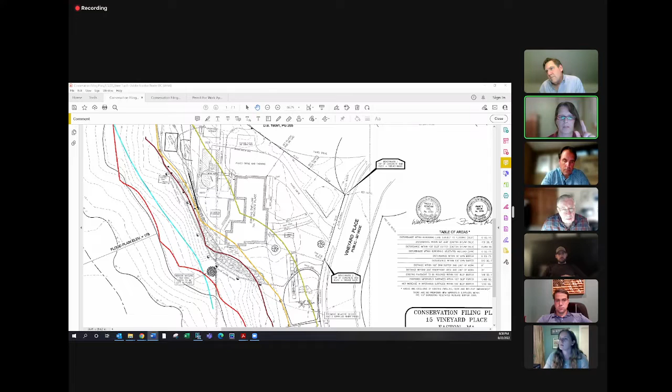You did mention one thing I don't think I caught in the application: the trees being removed from the work zone—is the plan to just cut those and leave them in the 100-foot buffer zone somewhere? Claire: I don't know if it would be all of them, but it was actually a response to your comment asking if trees were cut to be left at 10 to 12 feet. For some of them, because there would be regrading involved, they might not be able to remain. So if there are trees that have to be cut down to the roots or just stumped, the applicant's open to having some of those dispersed in the forested area to allow for wildlife habitat.

Jennifer: Okay, I'm sorry, I didn't mean for any tree, just the oak. Claire: Oh, okay, yeah, obviously you need to remove those trees to do the project. Jennifer: Yeah, sorry, that wasn't clear. Okay, understood, then we're happy with that comment—just the one tree. I think my only other comment is, if there's invasive species removal, it's for the commission to decide if you need any kind of reporting on that in the order or not. Just so I know if I need to write it or not, but that's it for me. Thank you.

Commission members? So, do we have any idea what the proposed filtration system is for the pool?

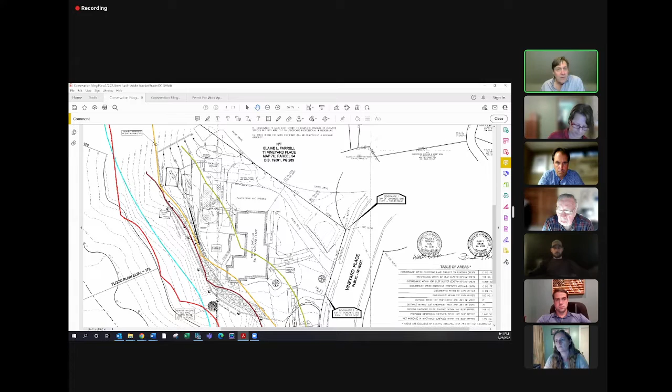I'm not certain of the filtration system for the pool. The only thing is, part of this—most of the work here involves some slight grading going on in that outer 50, right? That's the majority of the work, plus some invasive species and tree removal. So it's not a tremendous amount of work, but I'd want to make sure we're not discharging treated water back into the wetland area. There are typically two approaches we've had for this.

One option is to leave it up to the applicant to choose: either use a filter cartridge system, which has no backwashing at all, or use a saltwater system, which is typically less treated than chlorine. You end up with chlorine in the water just in a different manner.

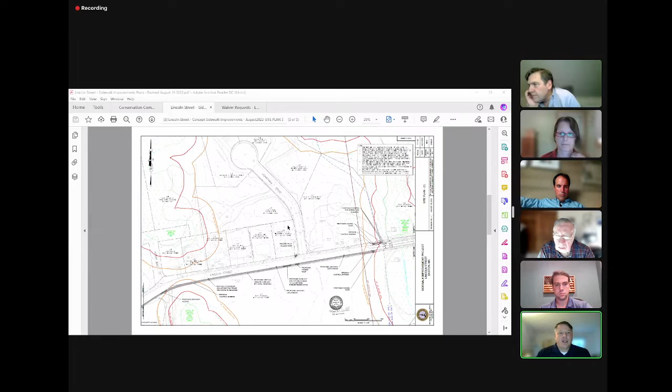There is a small area of wetland resource area in this stretch of the project, but we're not anywhere near that section of it. So basically, the project continues down Lincoln Street, past Ramblewood Road, and then up near Jonathan Drive. There's a small area of wetland down here. We'll be working within the 50 to 100 foot buffer zone to that wetland area, just for a small stretch to install this portion of the sidewalk.

And then the sidewalk continues over to this couple of wetland areas. There's a culvert that goes underneath the road here, in the main stream. So in this section, we'll be working within 200 foot to the riverfront, and also within 100 foot. And there's a small section of the 50 foot buffer.

We'll be putting in an access ramp and a portion of sidewalk. Essentially no changes to the grades in that 50 foot area, just to transition down to the road. And then in this stretch, we're not going to be proposing any improvements, just some line striping to create a pedestrian pathway. At some point, we're going to have to reevaluate this stretch to make the sidewalks continue, but that's going to be a larger, more involved project, and will take additional funding, which we don't have at this time. So we're going to skip that section and come back on the other side.

Again, we'll be working within the 50 foot and 100 foot buffer zone. In here, in this small stretch here, we're within a floodplain. And then the sidewalk continues up Lincoln to Aspen Hollow. And this over here is where the existing sidewalk begins or ends, whichever way you look at it. So essentially, we're creating a pedestrian corridor between this end of the project and Borderland State Park.

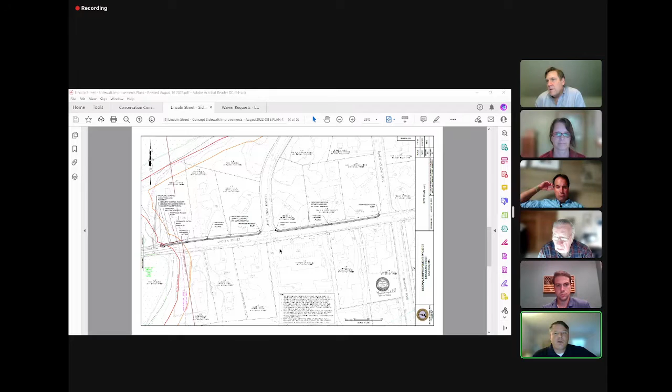So is there designs for those catch basins included? Yes. The leaching catch basin would be a perforated precast concrete structure with crushed stone around it. I believe they're 6 foot diameter structures with a foot of stone around the sides and ends, and underneath, to infiltrate water. The other structure, on the eastern end of Lincoln Street, is a standard catch basin with a leaching trench. The deep sump in the catch basin will help any sediments settle out before it goes into that leaching trench.

This is a typical detail of what we're proposing: the sidewalk, vertical granite curbing with bituminous concrete pavement for the sidewalk surface. How wide are the sidewalks? They're going to be about 5 feet wide, so about a 5.5 foot wide total impervious area. We match the grades on the backside of the sidewalk to meet the existing grades at the edge of the road.

Anything else, Matt, before I go to Jennifer? I think that's about it, unless anybody has specific questions. We'll get there. Okay, Jennifer?

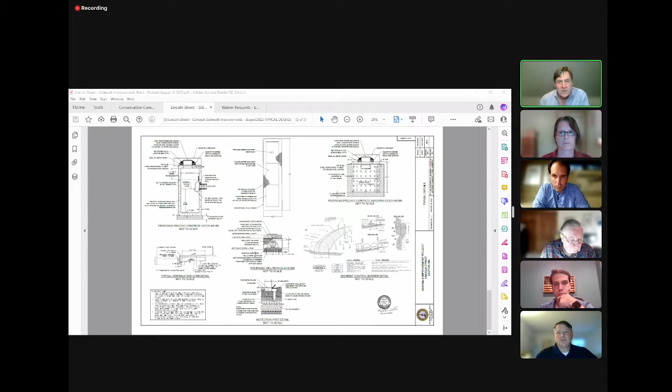I think the only thing that was suggested is that, if somehow in the next 3 years when this permit is still open, you find the funds or the manpower to do the portion that is through the wetlands, I think you should probably just come back to this permit and amend it. It'd probably be easier to do that. I think we would be open to that.

So I'm just suggesting that we'll leave that open from the permit standpoint, that if the applicant makes modifications to the section near 205 Lincoln Street, then we can consider that as an amendment. It's just easier to do it that way, and we don't have to have a whole other set of plans and a filing and everything else. We can just keep everything under the same permit. So the permit's good for 3 years, and you can ask for extensions too.

We're here to help. I think that was really my only comment. And any public comment on Lincoln Street sidewalk? Seeing none, Matt, I assume you want to close?

Yeah, that'd be great. Make a motion to close Lincoln Street sidewalk between Bay Road and Aspen Hollow. Benson, second. Caulfield's Benson, second. Roll call. Benson, aye. Carroll, aye. Grossman, aye. Caulfield's aye, that's 4-0. Any further discussion?

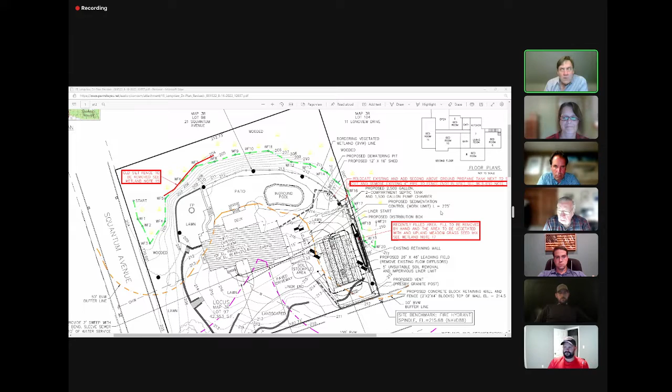Absolutely. Anything else from the commission before I go to public comment? Any public comment for 15 Longview? Getting these 15s confused, 15 Longview Drive. Any public comment? Raise your hand or put a note in the chat box.

Okay, so from my viewpoint, Peter, Collins and the applicant have addressed all the questions that we put forth. So I'm ready to close. Anybody else? We're good. Motion to close. Benson second. Caulfield's, Benson second. Roll call to close. Benson, aye. Carroll, aye. Grossman, aye. Spady, aye. Caulfield's aye. Any further discussion?

Seeing none, make a motion to issue a permit for work and order conditions for 15 Longview Drive. Spady, second. Caulfield, Spady is second. Roll call vote. Benson, aye. Carroll, aye. Grossman, aye. Spady, aye. Caulfield's aye. Thank you, Peter.

Right, and I think I got one COC later. Is there any question or reason for me to stick around on that one? No, I don't think so. That's 232 Prospect. Correct, that's all I see. Yeah, we're good on that one now. Took us a little while to get there, but we are. Okay, awesome. All right, thank you all very much. Thanks, Peter. Okay, see ya.

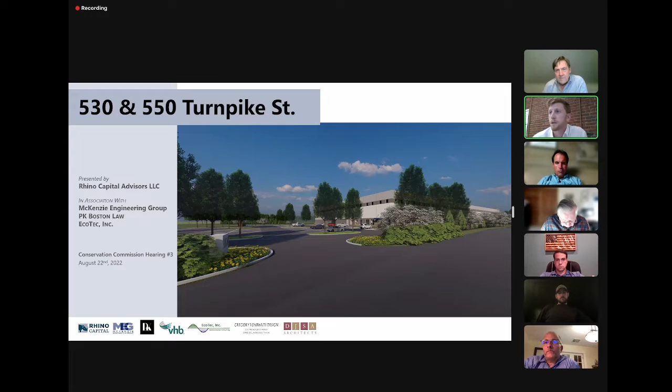So just to give everybody a little bit of context as to where we are today, again, 530 and 550 Turnpike Street, located about a half mile from the intersection of 106 and 138, about a mile and a half from... sorry, audio's still kind of in and out, doing my best I can here, I'll try to speak up.

79 total acres, comprised of 2 properties, almost 50 of which is existing wetland areas. 71 and a half, or just over 71 and a half, is rare species habitat area. Our plan is to stay entirely outside of that habitat area, as previously discussed.

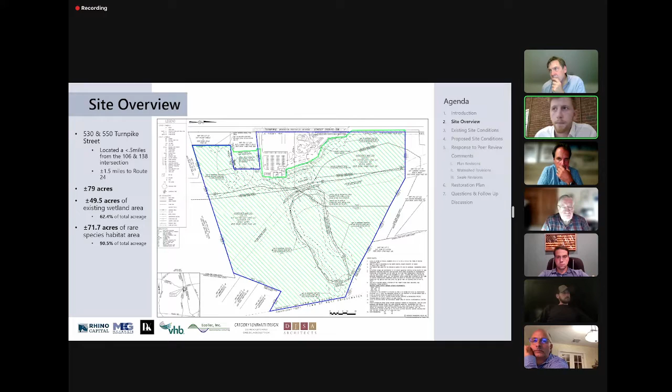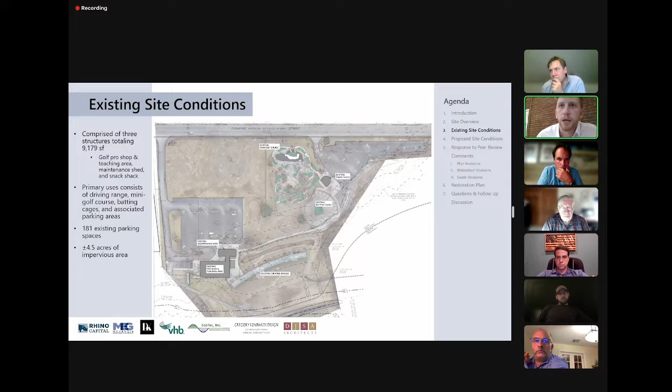Site is currently approved for a driving range facility. Again, a lot of this is recap, so I'll cruise right through it, but our plan is to completely demolish all existing structures and make way for a 101,000 square foot industrial facility comprised of accessory office and parking, as well as 7 proposed loading docks and 7 proposed storage spaces.

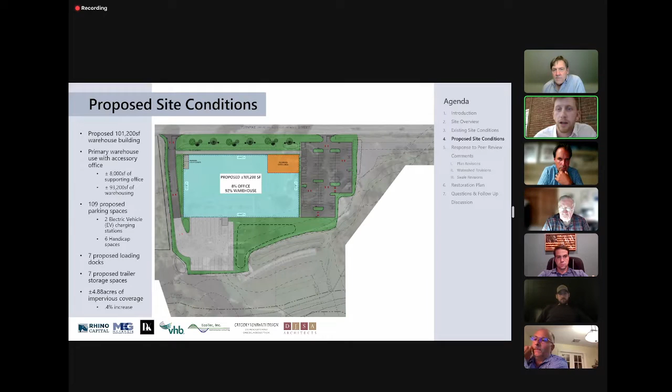To my previous point, we did receive peer review comments and our civil engineering team has since responded to those. And with that, I will turn over my shoddy mic to Austin to kind of walk through some of those plan revisions. Thank you.

Sure. Thanks, John. For the record, Austin Chartier with McKenzie Engineering Group. As John mentioned, I'm going to quickly highlight just mainly some of the key changes that we made in response to both Ms. Carlino's staff report as well as John Chessie's peer review letter.

So we received the peer review letter July 25th. And basically as a result of the review, we conducted some additional survey within the existing detention basin, which is also a bordering vegetated wetland. We conducted some additional soil logs just to nail down groundwater and soil type. And basically all these changes were addressed in a submission dated August 10th that was submitted back to the commission.

So just some key highlights here. The soil testing on August 3rd we conducted, we established groundwater and basically the soil type that we wanted to use for the drainage analysis, just to make sure that the peer review consultant was in agreement with everything that we saw out there. The logs were submitted to the commission.

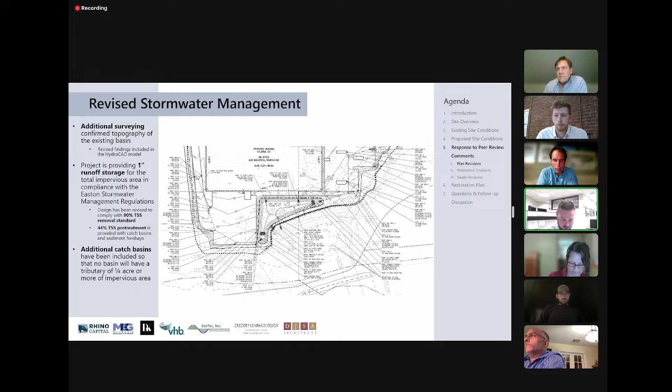So I just wanted to point out the new outlet that's proposed. There is an existing pipe underneath it. So essentially we'll go in and remove that pipe and basically replace it with this new 30-inch pipe that will outlet to the existing basin. In our operation and maintenance plan, we added language about providing inspections and routine maintenance of that outlet, as well as anything else within the basin, similar to the proposed stormwater basin, but just to include that area in our responsibility of maintaining the property moving forward.

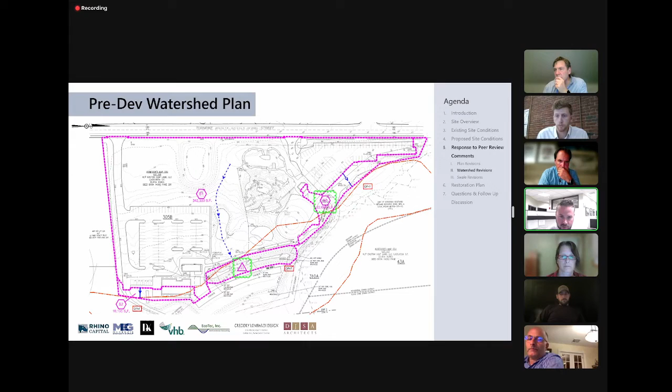In the proposed condition, it's very similar to the existing condition. We're capturing the developed site and increasing the undeveloped site that's going to flow towards the wetland. So part of this exercise is making sure that the increased volume not getting captured doesn't create an increase to the wetland. That's basin 1P, the proposed stormwater basin. It's sized and engineered to ensure we're holding back 1 inch of rainwater, which is where you'd see the increase in smaller storms that flow to the wetlands. We're also proposing low flow channels and a monitoring well as additions from the peer review.

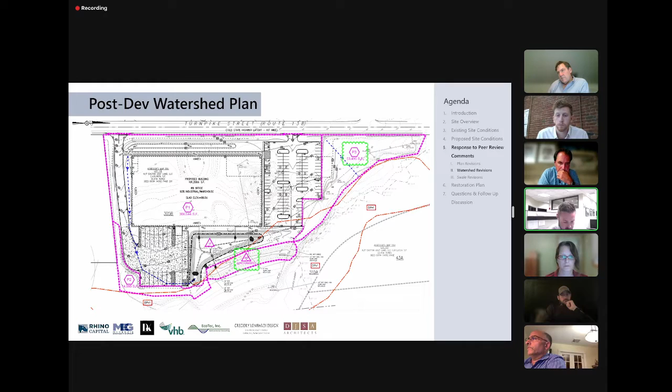The one other thing I wanted to note is that we're now proposing these grassed swales at the low points of the proposed parking lot. So in the worst case scenario that these pipes got clogged, or there are leaves over the outlets, that water's still going to get conveyed into that basin, even if the pipes are all backed up. As a last defense, water's going to get there no matter what, essentially. I think that was a good addition in terms of ensuring redundancy in the stormwater design.

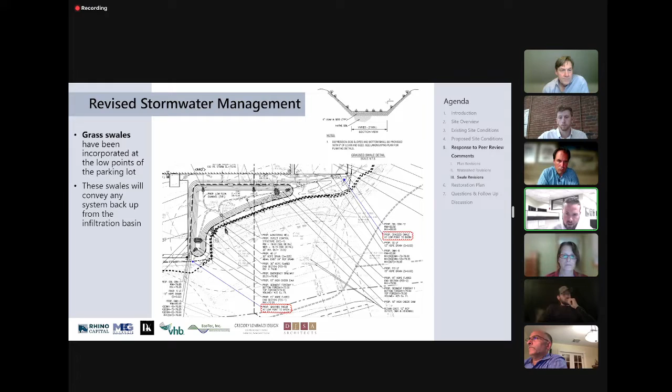The last slide I'm going to present is the water quality swale that we were originally proposing, which was incorporated as part of the initial meetings with the town. We've just changed the language on that—we're going to call it a landscape depression. We're not claiming any stormwater credits for it in terms of TSS removal, treatment, or volume. It's still a key factor of the project, as this landscaped barrier between the building and Turnpike Street, which is what the town mentioned they wanted to see. It's just going to be a depression that will be planted and landscaped professionally, but it's not necessarily incorporated into the design of the stormwater.

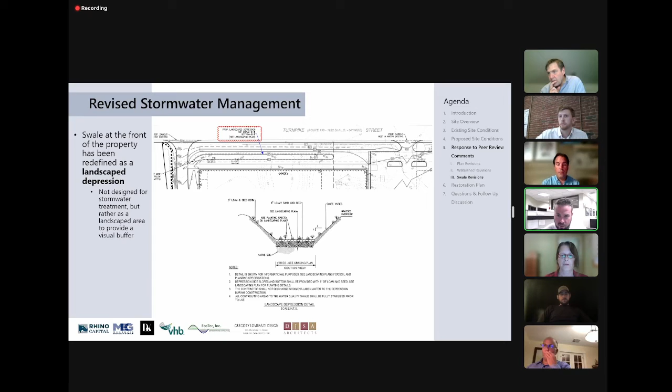And with that, I'm going to turn it over to Scott Morrison, who's just going to quickly speak to the restoration plan. Good evening, for the record, Scott Morrison from EcoTec.

So just reiterating the restoration plans. The existing driving range will be restored by planting 75 saplings, 75 shrubs, removing any of the impervious surface out there, and reseeding that area. The other important thing that will be removed is the fencing along either side, which serves as a wildlife barrier, so that will be removed as well. There'll be about 8 acres of upland habitat created by the project.

We're also providing 2 years of invasive species management. We've got a detailed evaluation report. A licensed applicator will go out there, notify the commission prior to conducting a visit, and then spot treat any invasive species to try and prevent invasives from colonizing the area. We'll provide a report upon completion to the Conservation Commission for the first couple of years of mitigation—a couple times a year for 2 years—and we'll provide reports on that.

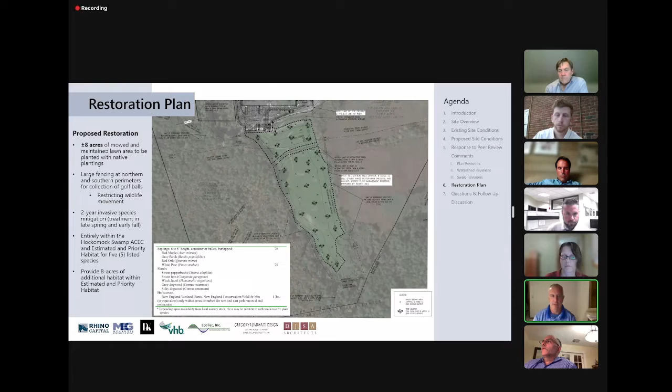Happy to answer questions or turn it back over to John to summarize things. Thank you, Scott. That pretty much concludes the presentation from our end. We'd be happy to answer any follow-up questions, but that's pretty much all we had for the commission this evening.

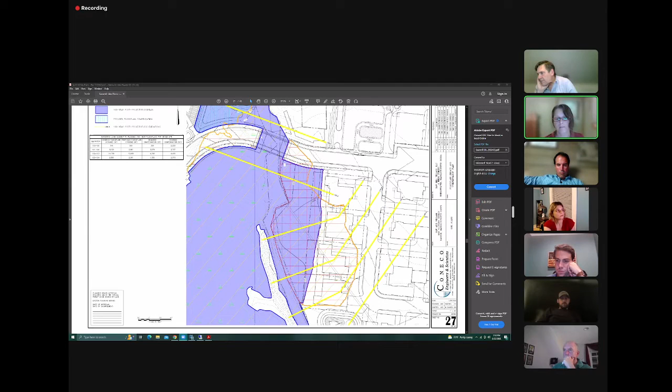Thank you. I know how each unit is configured was a major discussion with the planning board, so that's why I'm reluctant to have a condition that says change from this type to the other type. They're not looking at the floodplain. I understand, I just... yep.

Okay. Do you have another condition you want to go over? I do, let me get back to where I was. Thank you.

This is the one I was referring to about the visual barrier. It's very specific about how this visual barrier is to be constructed. Again, I wasn't sure if this was in addition to the medallions we talked about, or in lieu of the medallions that were on the plan set. But this was a new signage, I think, from what we had discussed.

So the medallions we haven't used in several months, it's an aluminum marker that we give out. And these 1, 2, 3, or 4 are standard boilerplate conditions that the commission has. So the visual barrier is either the post and rail fence or just 4x4 posts, and that's something the commission would discuss when they close the public hearing and before they issue the permit.